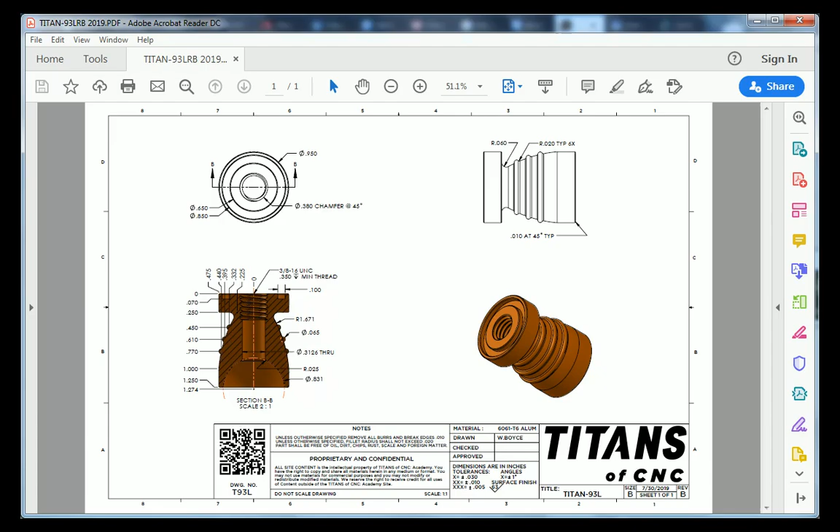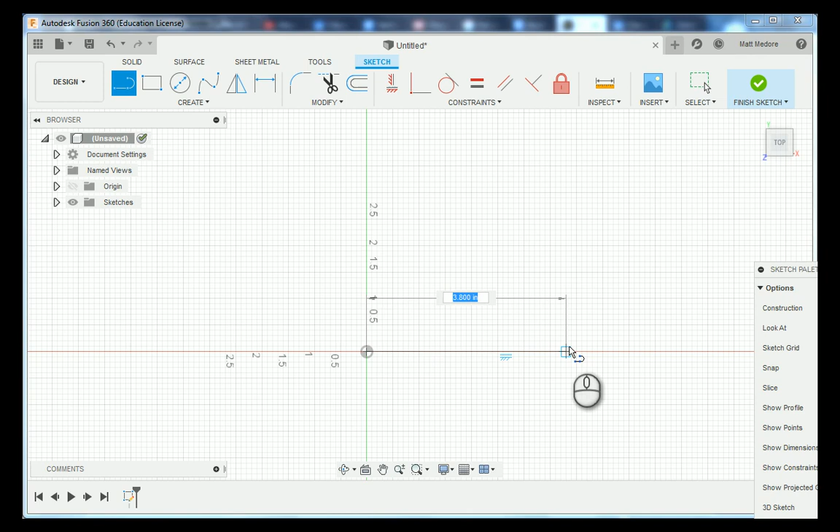I'm over here in Fusion 360. This particular part is a Revolve part, so we're going to create half of it. So very first thing that I'm going to start with is a line. We have our triad here with our three different planes we can sketch onto. I'm going to sketch on my top plane here, and I'm going to anchor my line right off of my origin. This line needs to be 1 inch, 250 thousandths in length, and then press enter on the keyboard.

Afterwards, I'm going to go back to L on the keyboard for lines. And I'm going to add in the geometry that makes up this flange here. L on the keyboard. And I'm going to add in the geometry that makes up the end of our part, like so. In between these endpoints, there's an arc that fits there, but we'll add that in a little bit later.

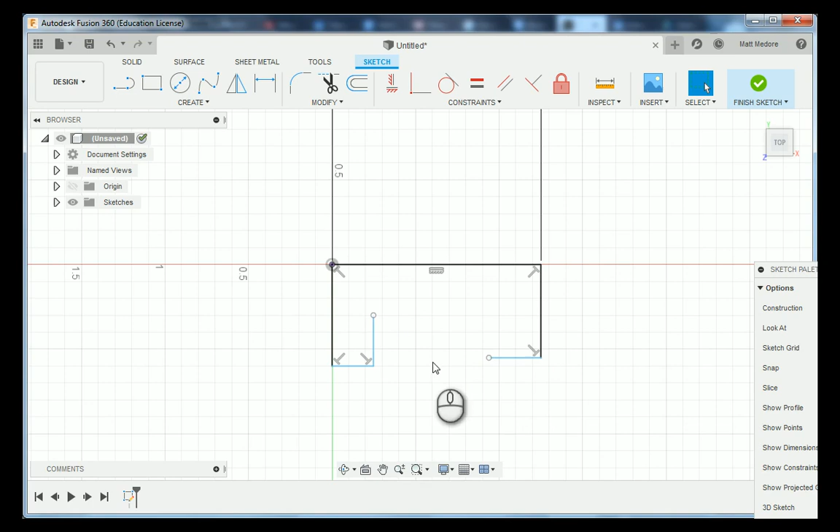According to our print, there's a relationship between this endpoint and the outside of our flange. We're going to go to our constraints and down to horizontal and vertical constraint. We're going to click on the endpoint here and the endpoint here, indicating that they are horizontal to each other.

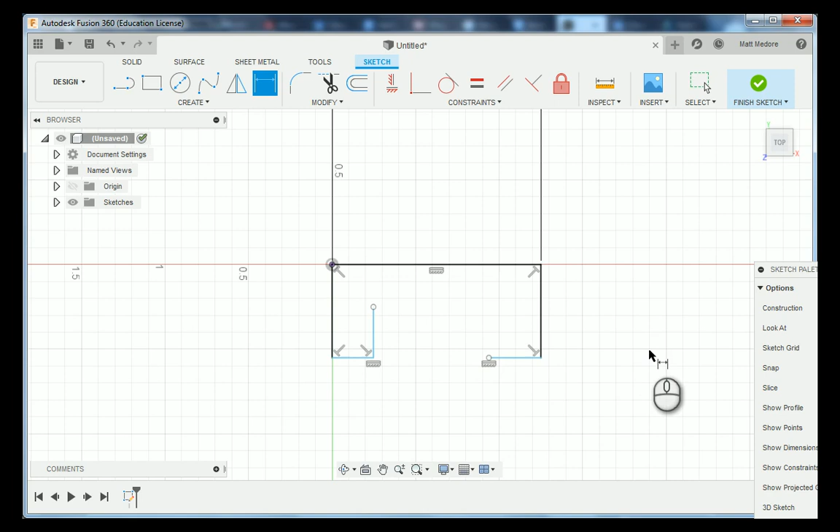After we have our constraint in place, we're going to add in some dimensions. So D on the keyboard. We're always going to be referencing off of our origin here. First one I'm going to reference off of is our origin down to this point, and dragging our mouse up, giving us a horizontal measurement of 250 thousandths. Back to our origin and to this point now, this needs to be 1 inch.

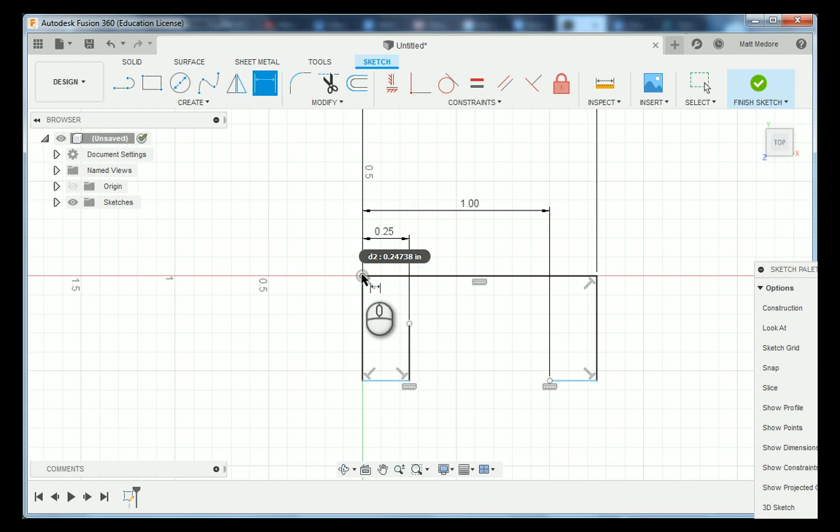Now that we have those two measurements in place, we're going to add in our vertical measurements from our origin to the end of our part. This measurement needs to be 475 thousandths. And then lastly, from this point to this point here, this needs to be 225 thousandths.

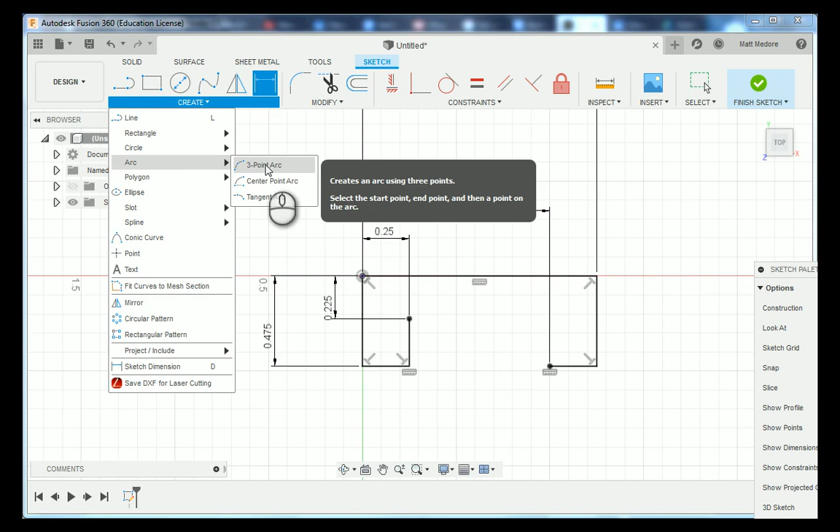Now that we have our geometry dimensioned, we're going to add in that arc. So create down to arc over to 3-point arc. We're going to click on that first point here to land one of our points there. Then we're going to drag our mouse in, adding in an arc. Afterwards, we're going to go back to D on the keyboard to give this arc a dimension. We're going to click on the outside of that arc and type in the dimension of 1 inch, 671 thousandths.

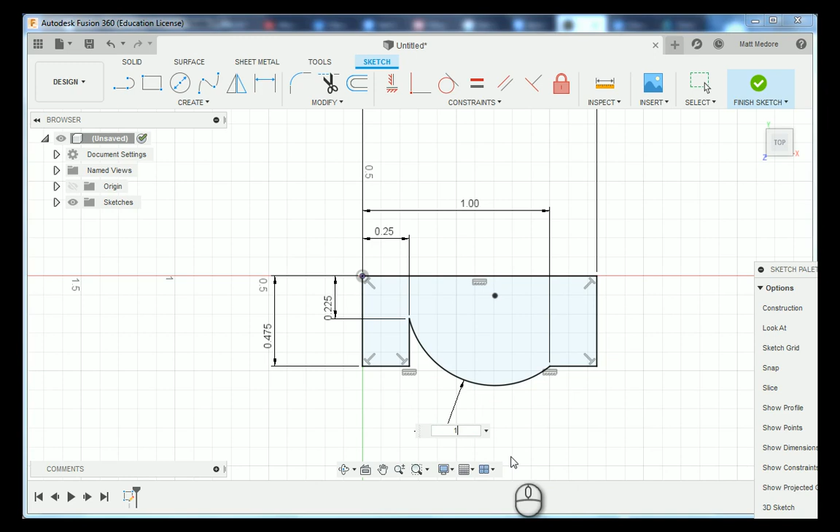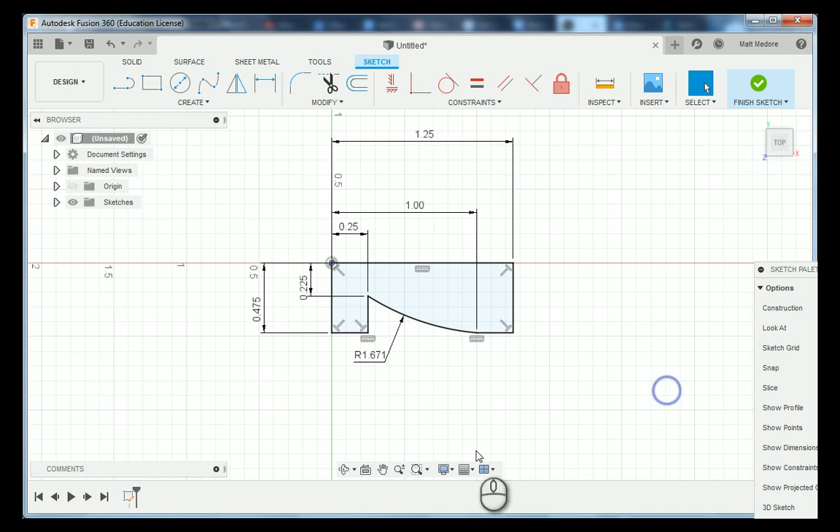I'm going to move this measurement in a little bit so you guys can see it a little bit better as I move on. In addition to having the outside profile here, we have 3 circles that are kind of on this arc here. So I'm going to go C on the keyboard. I'm not 100% certain if they're on that arc, so I'm going to place my circles over here off of the arc.

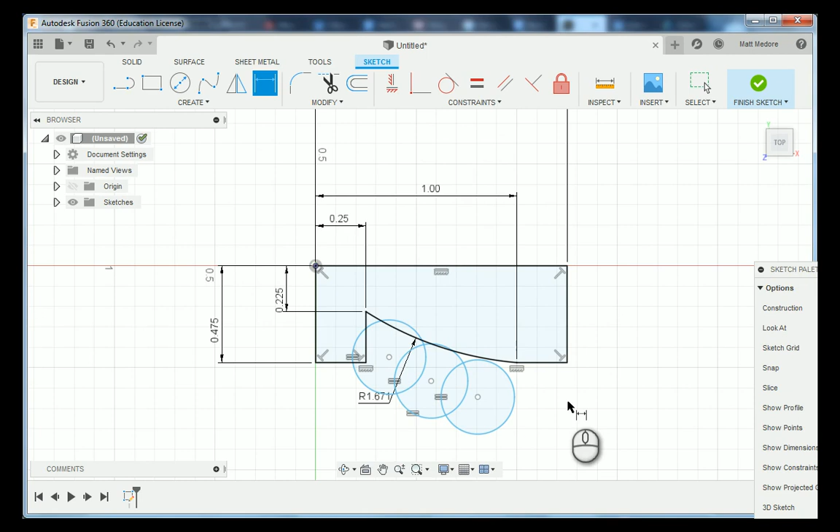And then these circles are all equal to each other, so I'm going to add a constraint in. Constraints down to equal. The outside perimeter of this circle to this perimeter are equal, and then the perimeter of that one to that one are equal. Now that I've got my constraints in place, I can add a dimension to one of them. And this dimension needs to be 65 thousandths.

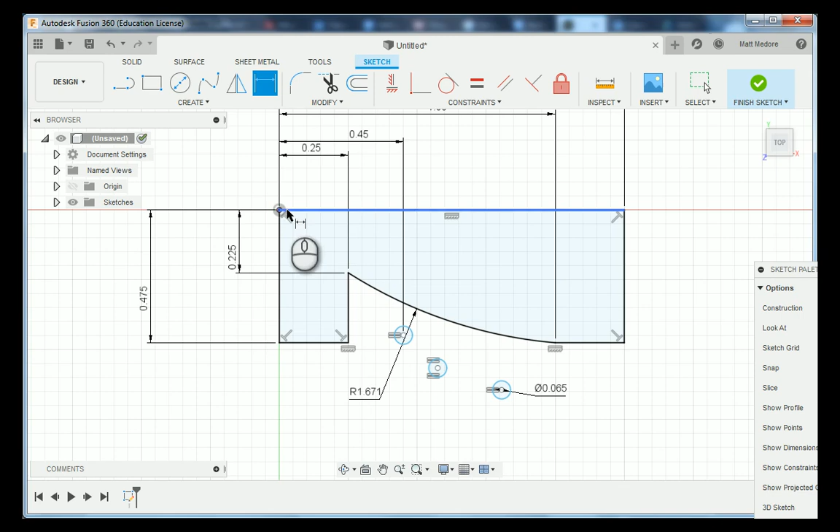Now that I have my 3 circles dimensioned, I need to give them a location. I'm going to go off of my origin to this very first circle, dragging my mouse up. And this location is 450 thousandths. The second one, referencing off of our origin, going up again, is 610 thousandths. And then the third one, again referencing from our origin, needs to be 770 thousandths.

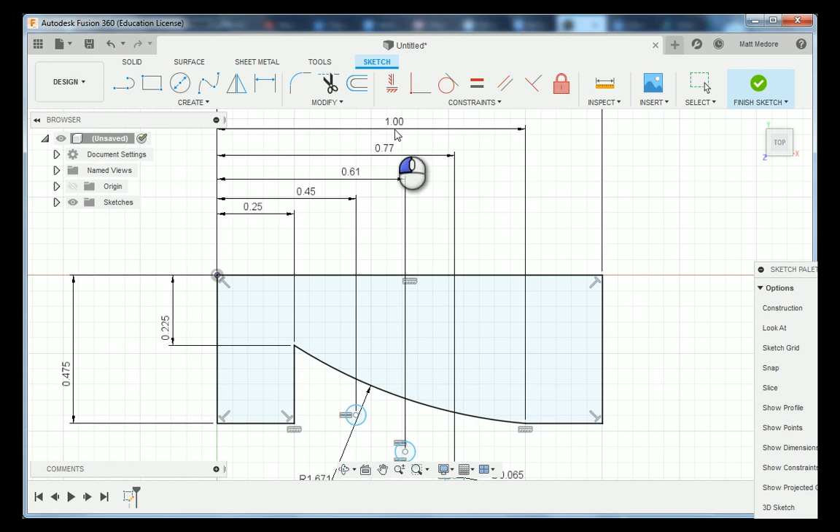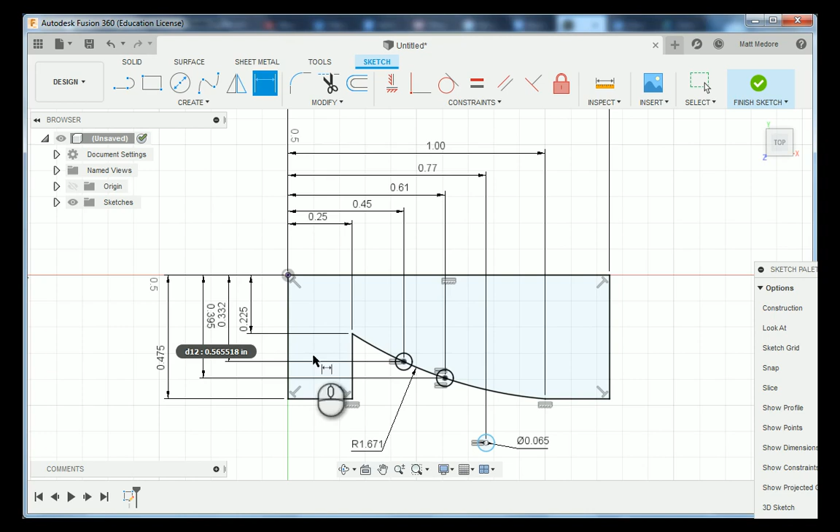I'm going to move my dimension line up a little bit, make it a little bit easier to read for you guys. Now that I have my horizontal measurements in, I need to add in my vertical measurements, D on the keyboard. Again, referencing off of our origin. This particular measurement is 332 thousandths. The second one here is 395. And then the third one, again, referencing off of our origin, is 440 thousandths.

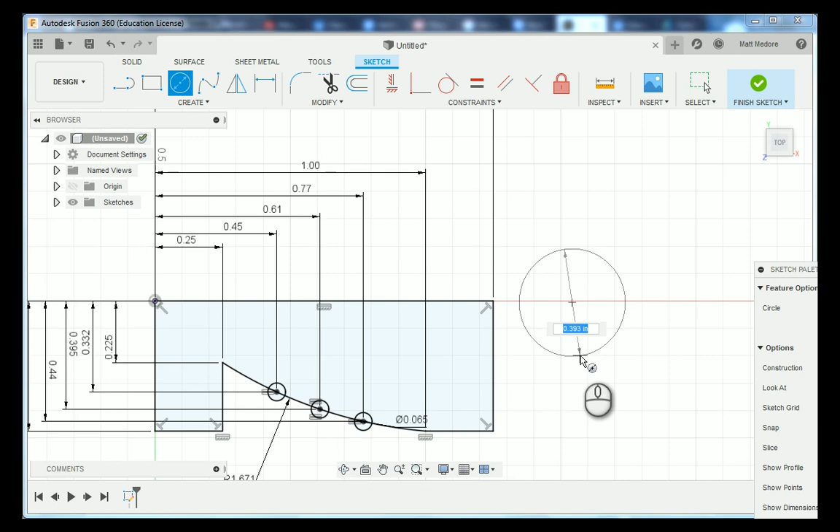Now that we have our 3 circles in place, we also have a big circle up here in the front of our part, so we're going to add that in. C on the keyboard. Drawing the circle out here. And this circle has a diameter of 831 thousandths. And its center here has a relationship. It is going to be horizontal to the point here, or the center line here. So we're going to add in that horizontal constraint, anchoring them.

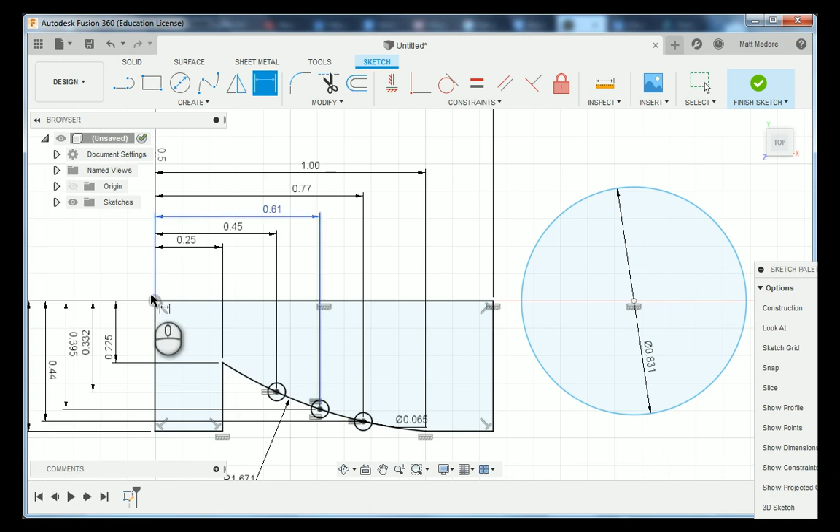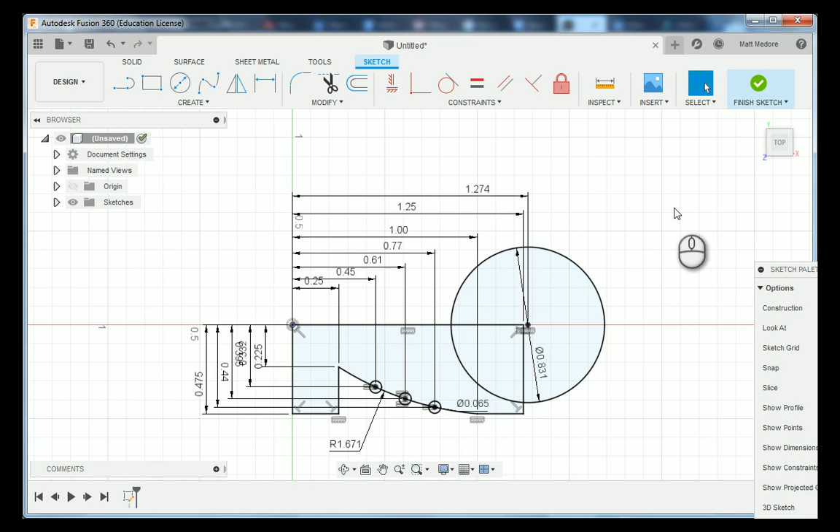And then I'm going to go back to dimensions, again measuring off of my origin to my center now. And this needs to be 1 inch, 274 thousandths. I'm going to tidy up my workspace like so. Now that we have our basic geometry in place, we can actually finish our sketch.

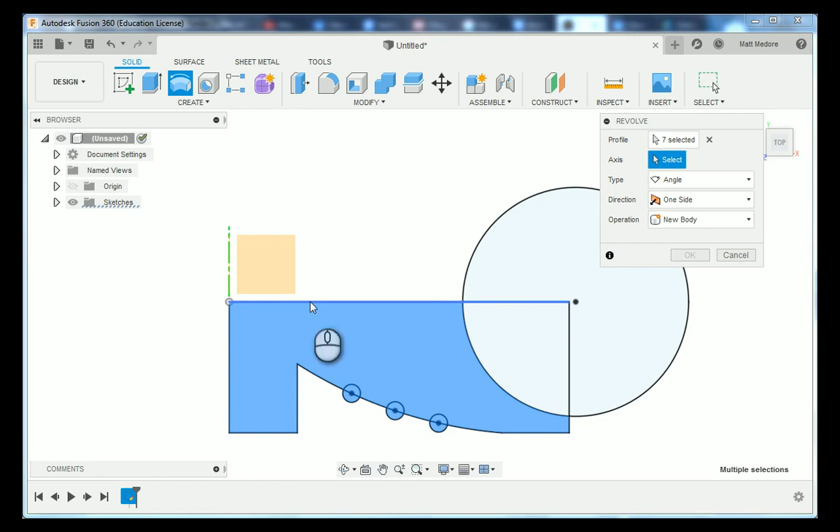And then we're going to revolve this part by going to Create and down to Revolve. The geometry that we're going to select is this geometry here, these circles, and we are going to exclude this geometry. We're going to select our axis in our pop-up window. We're going to choose the center line of our part, orbiting this part around, and then press OK.

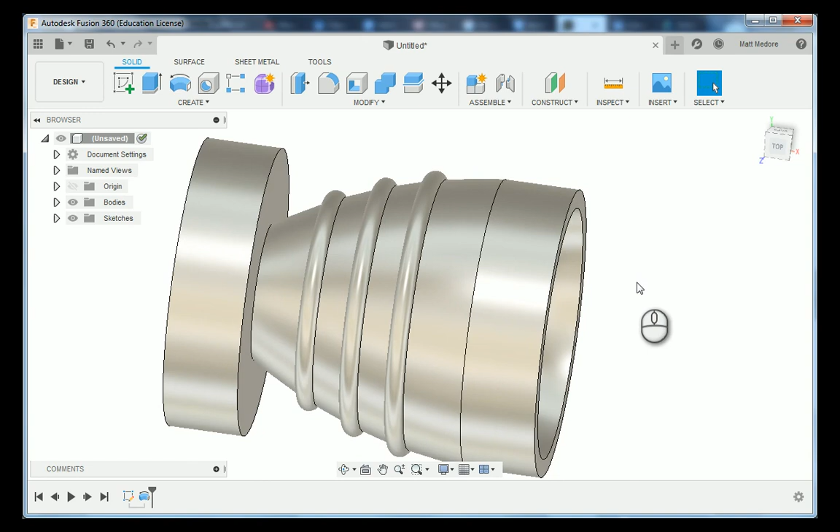Now that we have our solid body, we're going to start adding in some of the features that we missed. Very first thing that we're going to add in is there's a radius down here, so I'm going to go to Modify and down to Fillet. I'm going to click on this line here, and that fillet's got a dimension of 60 thousandths.

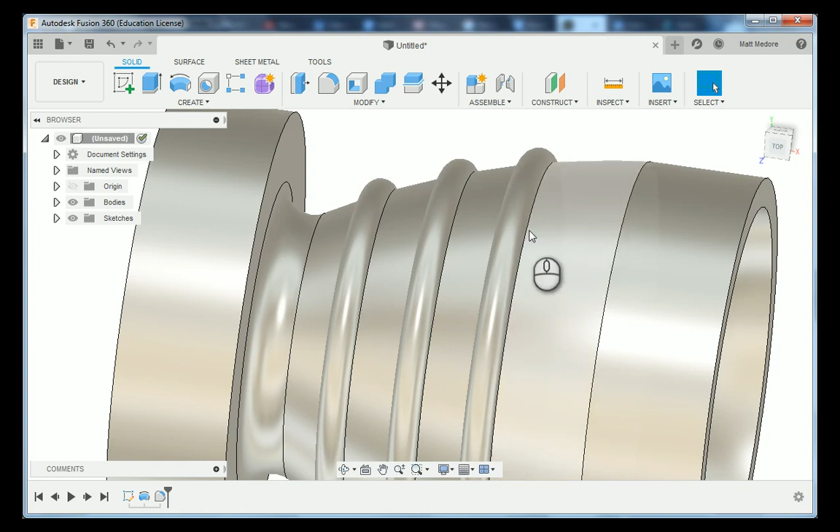In addition, each one of these little circular bosses here has a fillet that kind of comes off of the part and kind of blends it in. So we're going to right click and repeat our fillets. This time we're clicking on the outside of this circular boss. And if you misclick on something, you can always click on it again and it will deselect it.

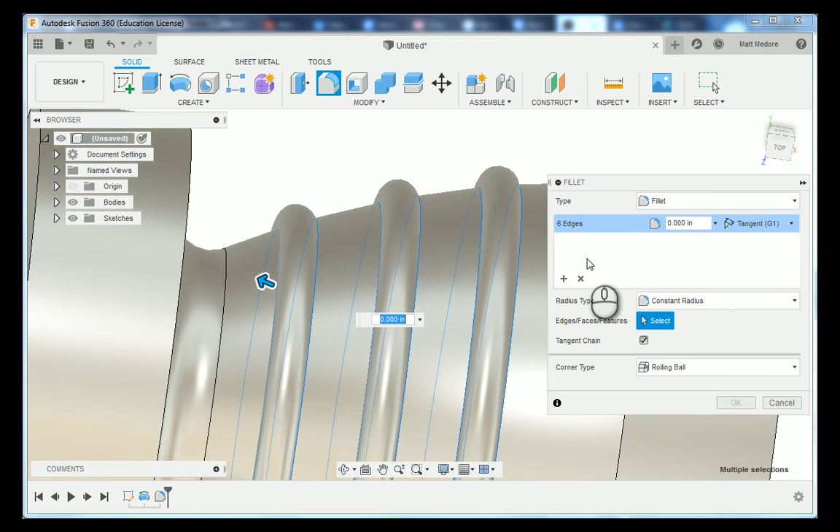Notice we have 6 edges that we're going to fillet. This time this dimension is 20 thousandths of an inch. And see how that fillet kind of blends the whole thing to the arc there.

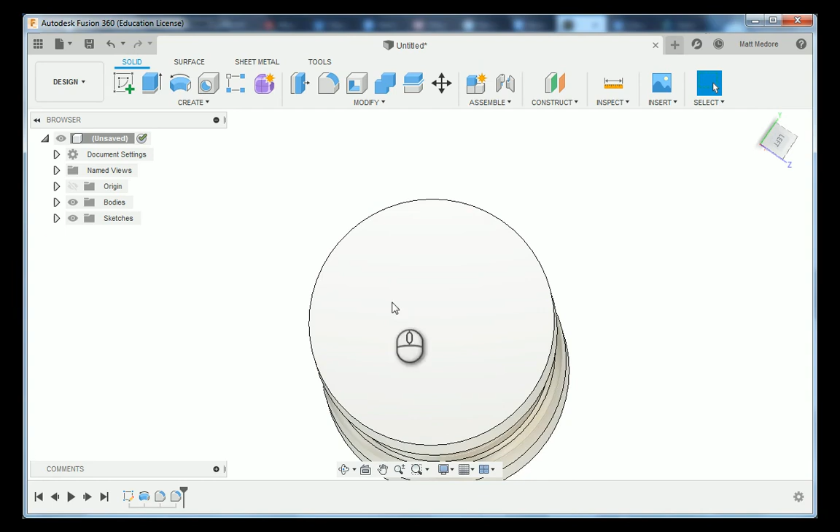Now that we have that in place, we're going to flip the part over. We're going to take a look at the front of our part here. The front of our part, we have that tapped hole, and we also have that face groove. We're going to put that face groove in right now. So C on the keyboard. I'm going to click on the front of the part here.

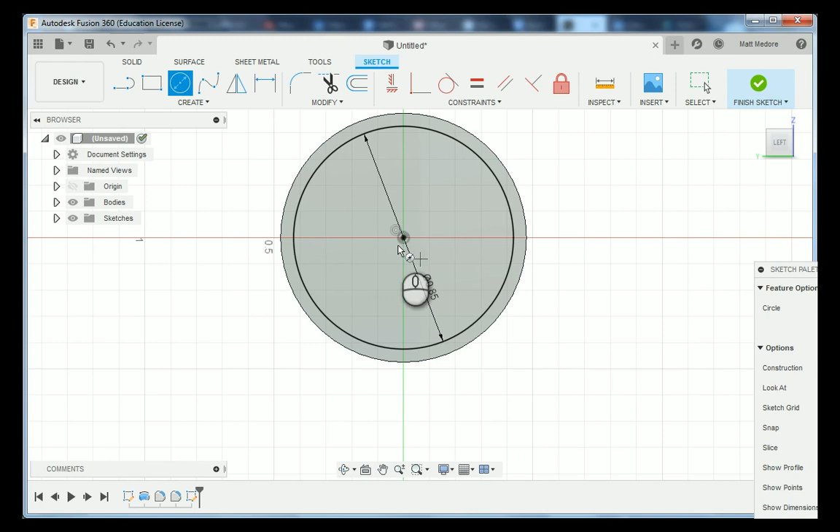Now I'm going to anchor it right from the origin. And I'm going to draw two circles. One is going to be 850 thousandths in diameter. C again on the keyboard. And then the other circle is going to be 650 thousandths. And then enter.

I'm going to right click, press and pull. Now I'm going to choose this area that we just pressed and pulled. And this needs to go down 70 thousandths, so I'm going to put minus 0.07 for 70 thousandths. And then now we have that face groove.

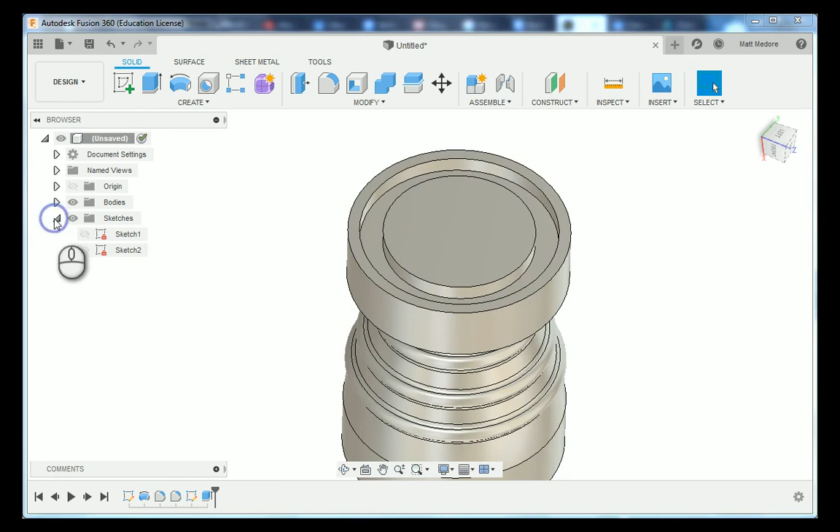While we're here, we're going to put in that tapped hole. I'm going to go over to my browser window and turn sketch number 2, its visibility back on. And then I'm going to go H on the keyboard for hole. And I'm going to turn the visibility of my origin off. And I'm going to choose the center of those circles I just created. That way that hole is nice and concentric to the circles.

In our pop-up window here, we're going to be using a countersink because it's giving us a countersink diameter. This hole goes all the way through the part, so I'm going to go to Extents to All. The countersink diameter is 380 thousandths, and its angle is 45 degrees. Well, when we're using a countersink, we're going from side to side, so we actually are going to double that. They call that an included angle. So we're going to be using 90 degrees.

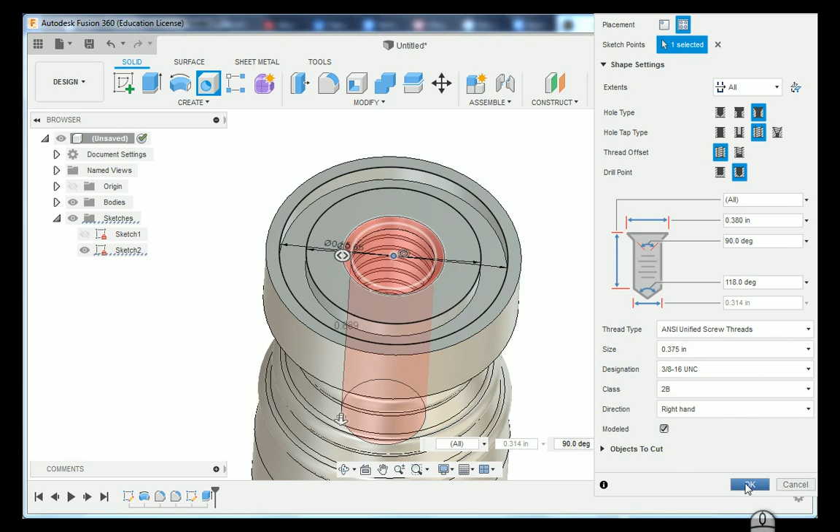Jumping down to our size, we are going to be choosing the decimal equivalent of 3/8, which is 375 thousandths. Our designation is 3/8-16. And our classification is 2B. We are going to turn modeled on to model these threads. And then lastly, we are going to press OK to lock all of our measurements into place.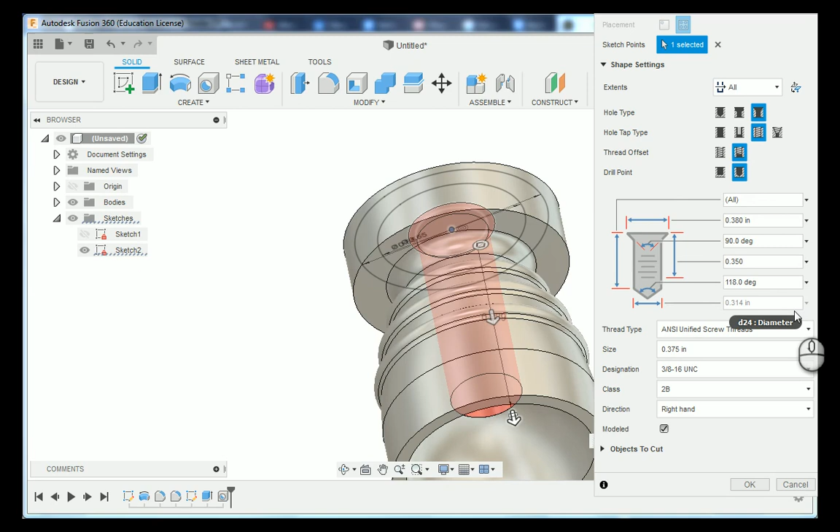And what we're going to turn on is thread offsets. We're going to go to offset threads. And notice these dimension lines appeared. We're going to change this dimension right here to 350 thousandths. And then OK. Notice if I look at my hole now, my threads do not go all the way through. That's more or less what I'm looking for.

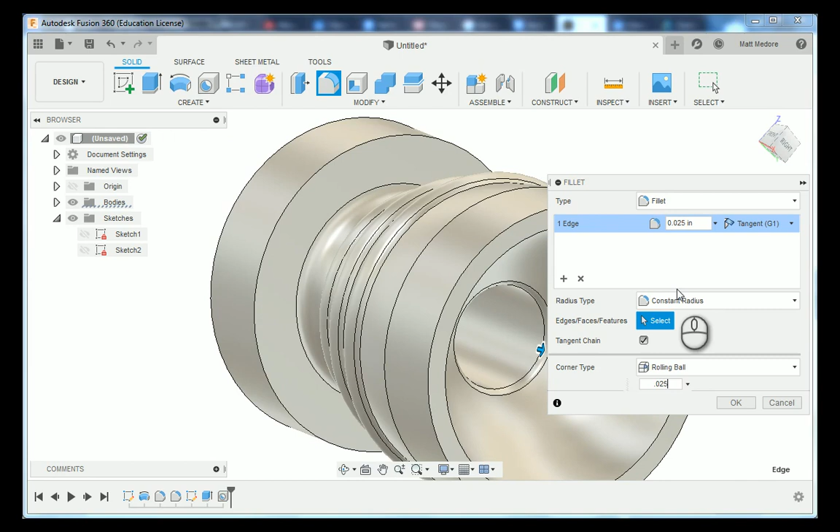While I'm here, this edge right here that I just clicked on, that needs a little corner radius on it. So I'm going to go to Modify and down to Fillet. We're going to click on that line, and then this radius needs to be at 25 thousandths. Almost done with this part. I always save my chamfers to the very end.

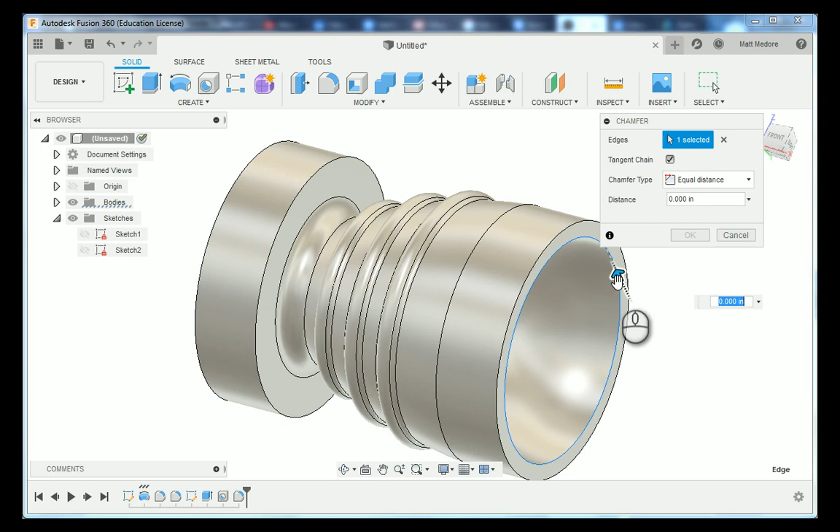We're going to go to Modify and down to Chamfer. We need to cut or chamfer all these sharp edges off. So we're going to choose this inside of our bore here, the outside of the part, the outside of our flange. We're going to orbit our part over where our face groove is and choose those two lines. And we're going to chamfer this at 10 thousandths of an inch, breaking those sharp edges off. And then press OK.

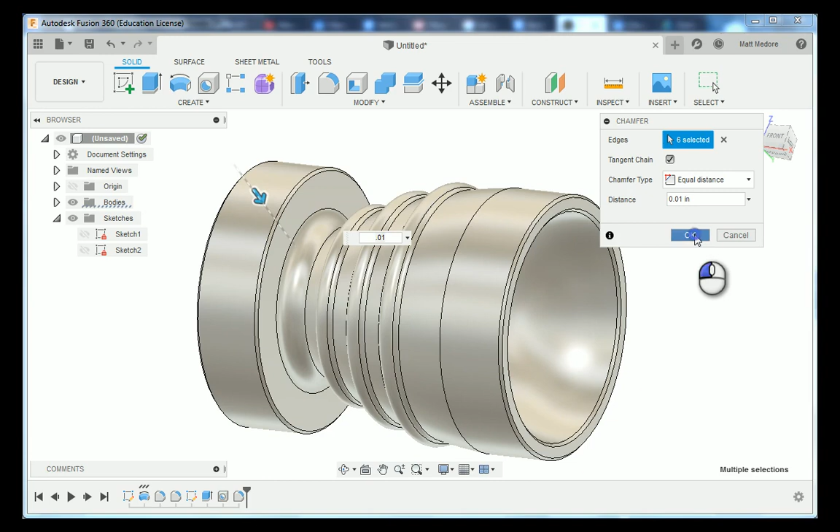This is a good opportunity. Double check your part. Make sure that you've got all the features as stated on the print. And this concludes how to 3D model the Titan 93L.